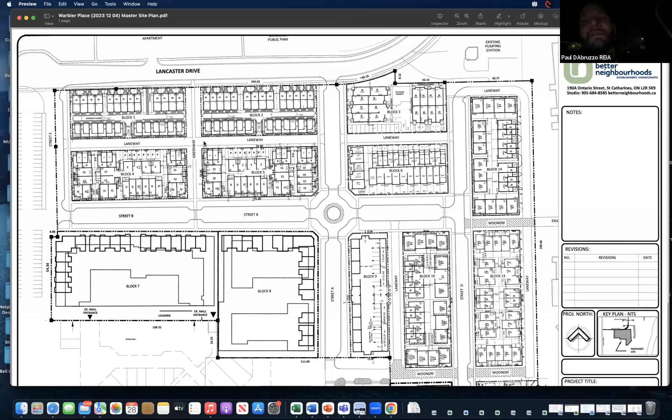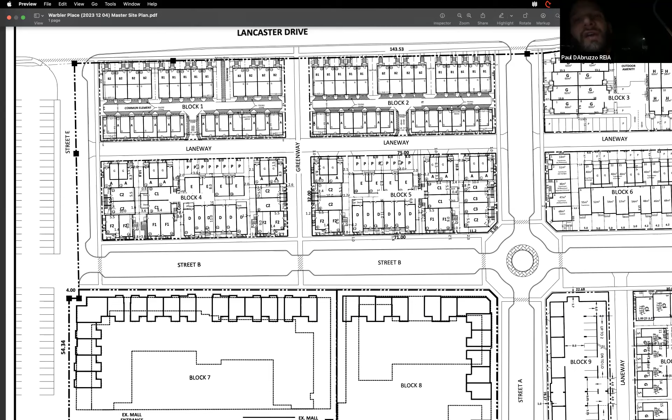While Drew's pulling that up, I'll quickly mention some of the sentiment from our end on the sales side has been positive. Things have actually picked up for us, for investors, closer to the end of December, as sentiment about interest rates has been better. Now that's not to say we're going to go from zero to hero and things are going to be flying off the shelf like they were, starting in January. That's definitely not what I'm saying. But it looks like it is, with what all these banks are predicting. If we hit our peak in interest rates this fall and into early winter, that means things are only going to get better. It's going to take some time, but that's definitely positive for when we do have to hit sales. So jump into it, Drew.

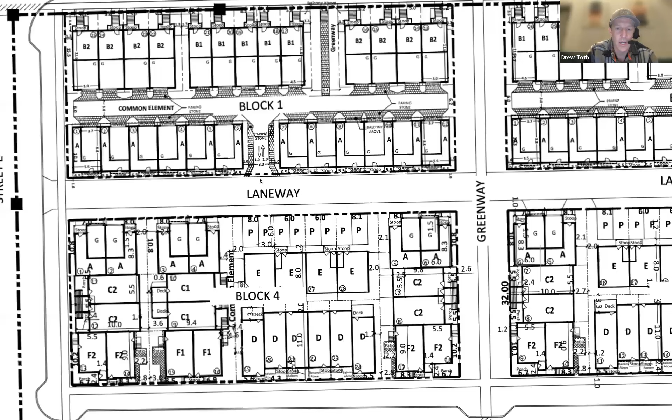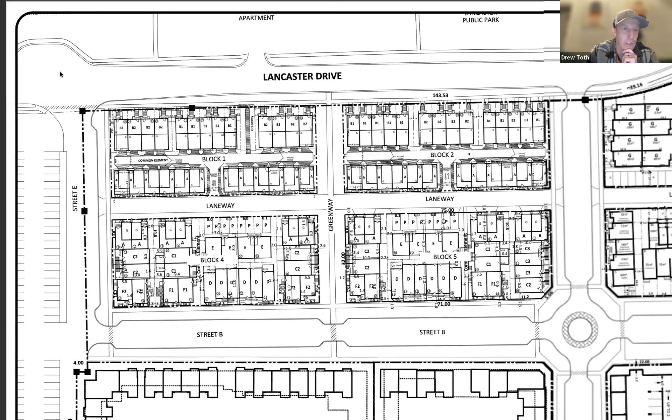Sounds good. Okay, so on the screen you can see, I wanted to give you context. This is the overall site plan for the mall project, and we are strategically starting on Block 1. So this is our block here, guys. As you know, originally we were Block 4, but we bumped it up to Block 1, just from a staging standpoint - we're working from the street in towards the mall and around. So this is our block here. I'm going to zoom out. We have the nice greenway aligned beside our block and the main entrance here off of Lancaster. All right, I'm just going to switch now to the servicing plan.

Okay. Getting to see my lovely busy desktop there for a moment.

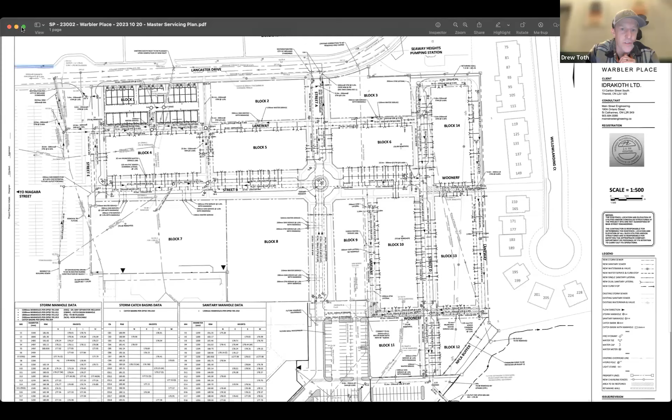Okay, so this is our master servicing plan, and I'm going to zoom in on our specific block here.

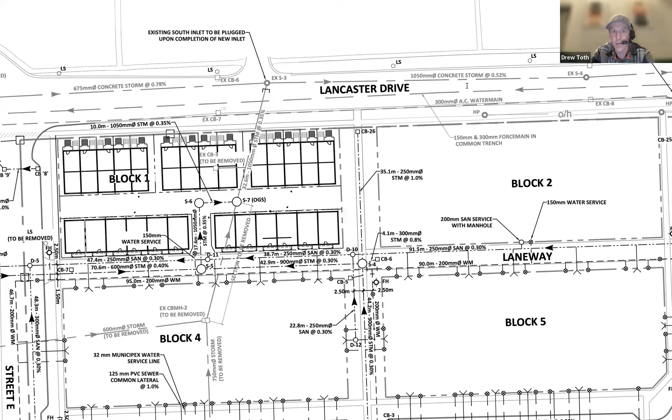SAN is for our sanitary line, STM is for stormwater management. Once we get our servicing permit, we're going to be putting in our sanitary lines for the whole site, our water lines for the whole site, and our stormwater management drains for the whole site, because all of it is interconnected, going from smaller piping to the larger main pipe up to the larger pipe on Lancaster Drive. You can see the main water main we're connecting to - this is the city's water main on Lancaster, the large concrete storm, and also the sanitary line up here.

You can see here we've got the SeaWay Heights sewage pumping station that we'll be connecting and pumping our stuff out of. Okay, I'm going to zoom out of this now and bring up our site plan with a couple markups we've been working on.

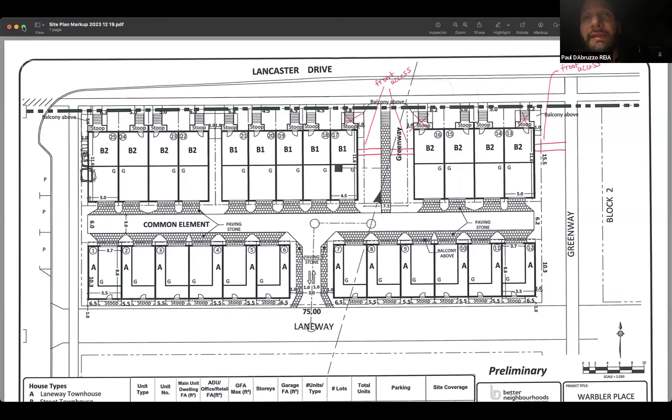While you're doing that, I'll just remind people who aren't full-time developers that servicing is something we have to do before we start digging any foundations. We have to bring in access to water and access to sewer so the water can go somewhere - that needs to be underground before we dig foundations. So not just this block, but all 15 blocks are going to get completed with servicing, and only then can we start to dig foundations. That's what some of the delays has been over the last couple months.

Just in case you needed a review on that point, but jump in there, Drew.

Sounds good. So this is our site plan on the separated out scale. You can see we have some nice paving stone as accents here, and the nice walkthrough, which is the greenway. Because we have this now, instead of all these stoops coming off the front of the townhouses looking the same, we decided we could improve some of these corner units that have side walkways. So you can see where the red is - we've added, instead of the access to the townhouse being off the front, we've put it off the side, off the greenway, on these three corner units.

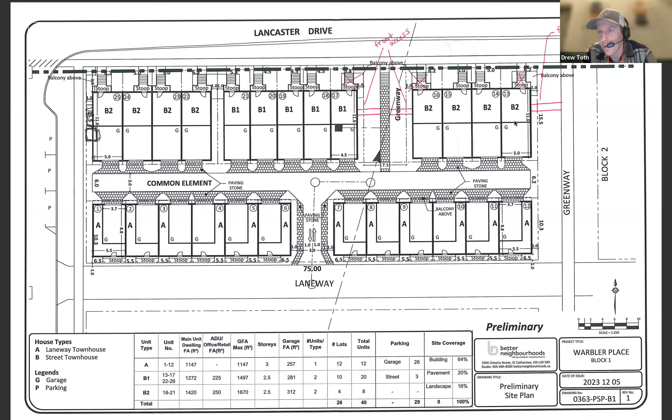And what I'm going to do now is stop sharing for a moment, and add the actual building plan markups here. Just a moment through those.

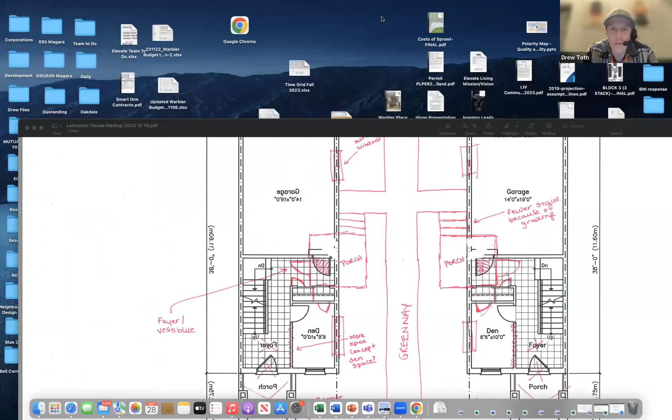Let's get that zoomed in nice. There we go. Okay, so you can see this is just at the end of December that we started doing these changes.

So what we did is we flipped the front porch around, and because of that we were able to remove a stair due to the higher grading here - a little bit more economical design. The layout we're able to do is much better because off the greenway, you come up the stairs onto the porch into the entrance of the house on the side. And we're able to add another window here to bring in more natural light off the side.

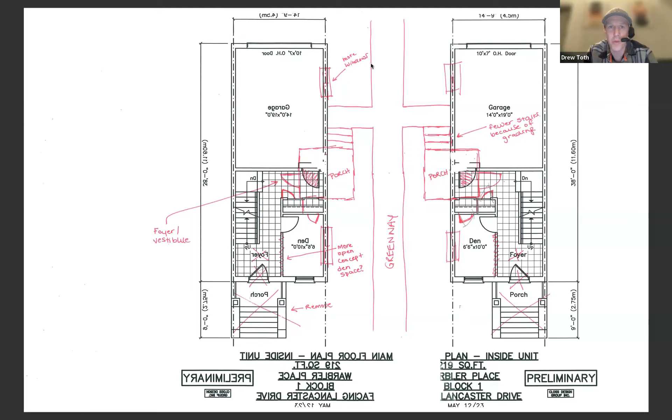And we decided because we removed this, we could also blow out this wall here and make it a more open concept space. We did that on both sides here, you can see. Just some tweaks we do while we're working along to make the design better, a bit of a higher sale price for these corner units, and make the design a little bit better as we go along. Just going to stop share.

So that's really all of the updates we have for tonight from my side, Paul.

Yeah, just to cover Frank's question, Frank, and rightly so, is asking, hey, what's going on with the money? We put up 10% deposit. We have to give another 90%.

We want to know, or Frank wanted to know, when that money would be due because he's kind of holding on to it and wants to plan for his money. So, correct me if I'm wrong, Drew, but the last update we had was we'd be ready for the spring to accept the money, and for now that's still on schedule.

Correct. Yep. And we kind of just went through the whole premise behind that. Some of these delays are outside of our control, and the servicing delay we didn't expect.

I don't know if I froze or you froze, Paul, but I missed the last couple minutes of what you said. A couple minutes? Sorry, like one minute. Okay, bad estimate of time there.

Yeah, I was saying all these things that are outside of our control are a big reason why we didn't collect 100% of the investment capital. Because if you were holding that right now and we were experiencing delays, it would hurt your ROI and our ROI a hell of a lot more, and probably stir up some emotion.